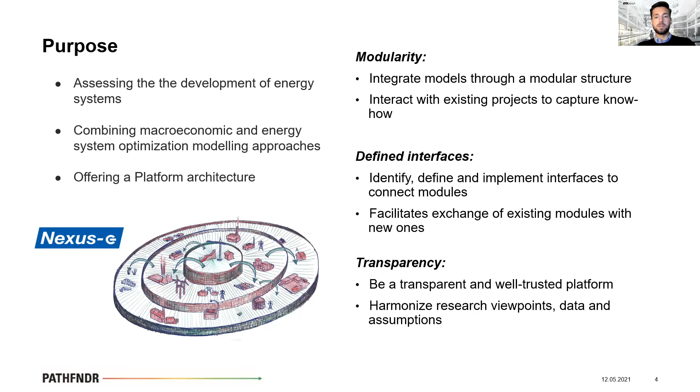Currently, the platform offers 5 core features that build upon knowledge and methods from different disciplines, such as electrical engineering and macroeconomics, and currently focus mostly on the electricity system. And these 5 core features comprise the electricity system optimization of the centralized and decentralized system, electricity market optimization, grid security assessment, and macroeconomic assessment. I will come back to these core features at a later part of the presentation.

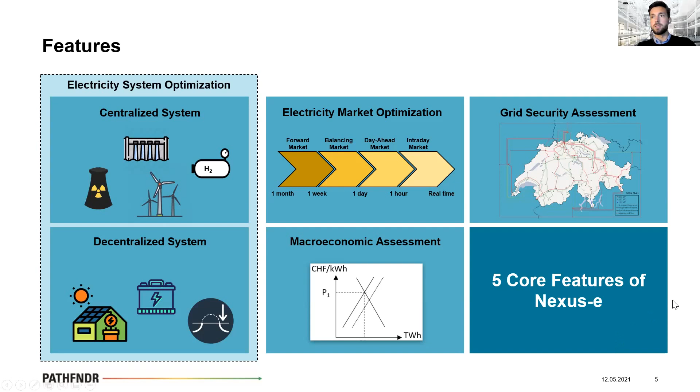Using these core features, Nexus-e is able to represent electricity systems in full detail on transmission grid level, including lines, nodes, and generation capacities. Countries are hereby either represented in such full detail or in aggregated form, for example, as a single node that combines national electricity production and demand, or even only as an exogenously fixed electricity flow.

In principle, the temporal coverage is unlimited and only depends on input parameters, but currently we typically model the years 2020, 2030, 2040, and 2050. Simulating such multiple years also allows to include path dependency, meaning that the model knows in its 2050 simulation what has happened today, in 2030, but also in 2040.

Furthermore, Nexus-e can take different temporal and spatial resolutions depending on the model or module. For example, while the macroeconomy module has an annual and national resolution, the module for investments and operation of centralized energy units has an hourly and nodal resolution.

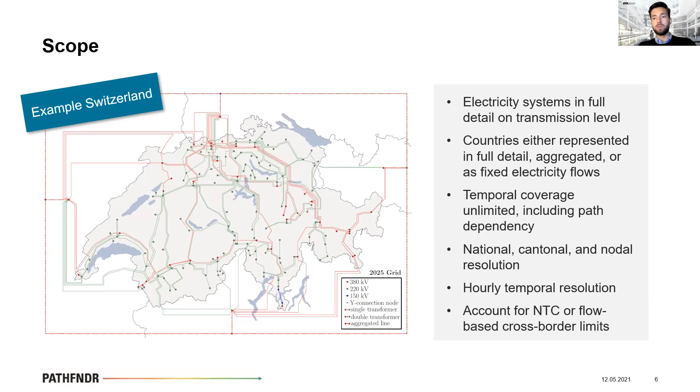So how can Nexus-e be used? Last year, we completed the pilot and demonstration project, the role of flexibility providers in shaping the future energy system, together with BFE and two industry partners. The goal of the project was to develop a suitable tool with which we can represent the Swiss electricity system holistically. In particular, we wanted to compare centralized and decentralized technologies as options to provide short-term and long-term flexibility.

Short-term flexibility balances sub-hourly and hourly deviations in the actual electricity demand and generation, and it supports system stability and frequency control. While on the other hand, long-term flexibility accounts for the daily, weekly, and seasonal needs for generation or oversupply because of outages, weather conditions, or seasonal changes.

In particular, we aim to answer 4 research questions. What are potential pathways for the future Swiss electricity system? What is the need for flexibility in such a system and who provides it? And lastly, what are the macroeconomic and environmental impacts of such a system?

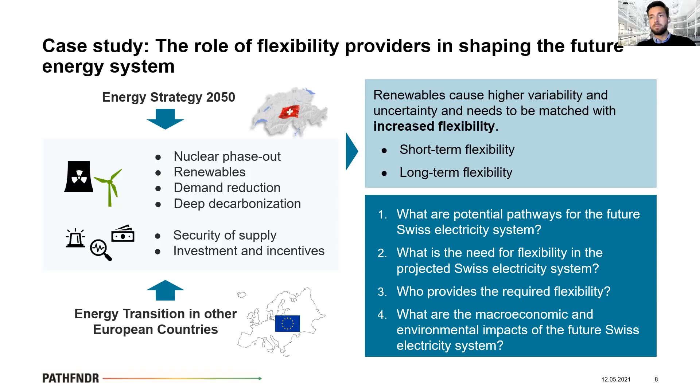To address the questions, we defined 3 scenarios. The baseline scenario represents the business as usual and includes expected technical and economic developments, as well as the status quo of the Swiss policies.

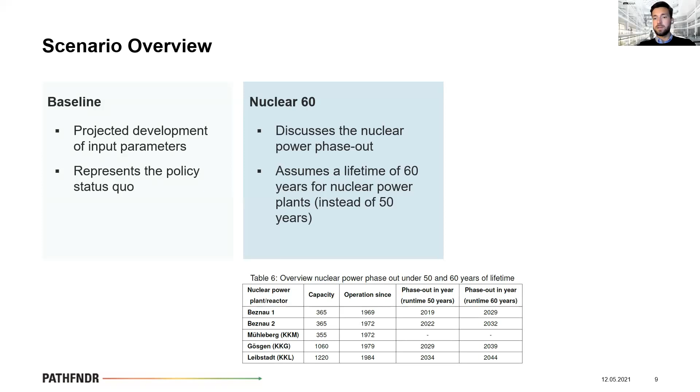The nuclear 60 scenario reflects the uncertainty around the phase-out of nuclear power in Switzerland and assumes that nuclear power plants will be decommissioned after a lifetime of 60 years instead of 50 years in the baseline scenario. The high flexibility scenario simulates the impact of an increased supply of distributed flexibility in the electricity system and assumes lower battery costs and higher potential for demand-side management.

In order to visualize our simulation results faster and to make them publicly available, we have developed an interactive visualization tool and made it available on our homepage. And I would like now to use this tool to also present some selected results. So I will now switch to the browser, and please let me know if you don't see the browser.

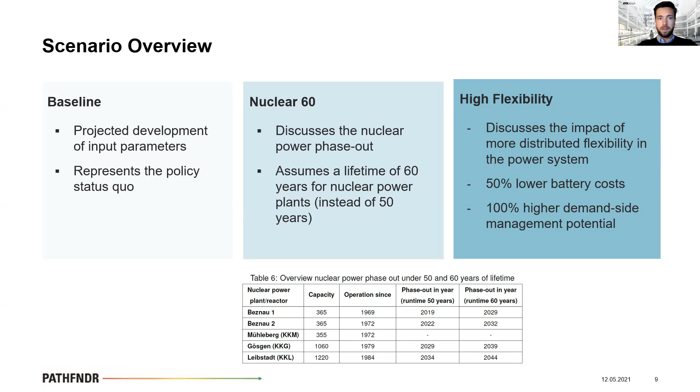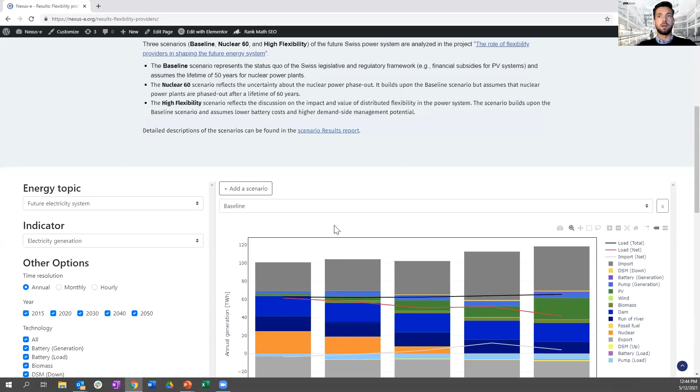So here you can see this is our Nexus homepage, and we have here the button for the results viewer, where you can have a detailed look at the scenarios which I just described: the baseline, nuclear 60, and the high flexibility scenario. So I will now have a closer look at the total capacity development for the baseline scenario.

So what do these changes in generation capacity mean for electricity generation? For this, we can look at the electricity generation tab, again for the baseline scenario, from 2015 to 2050 in terawatt hours. And what you can see is that in the baseline scenario, PV cannot compensate for the loss of nuclear power despite its substantial investments. Therefore, at least in our simulation results, Switzerland becomes a heavy net electricity importer in 2030, 2040.

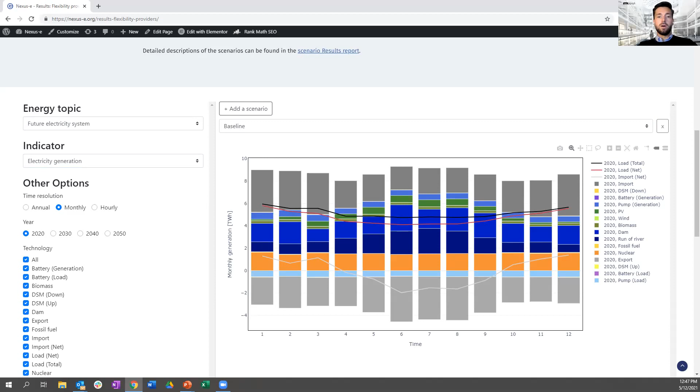Now we can have a look at the same graph for the year 2050. And what we see is that the known problem actually becomes even more drastic. In summer, we can expect a significant overproduction by solar power, while the domestic power deficit will continue to increase in the winter period.

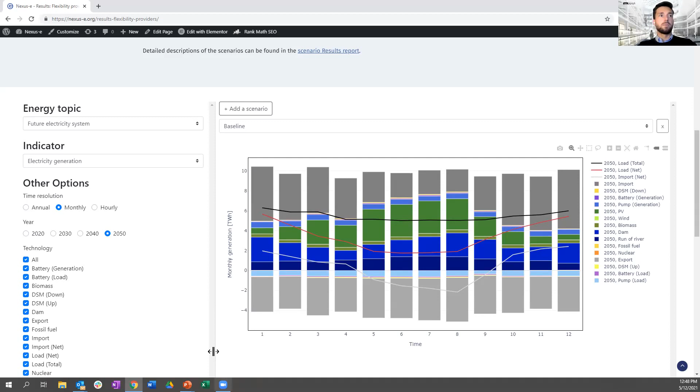Again, in our scenarios and simulation results, the required seasonal flexibility is achieved mainly by imports and exports, so importing in winter and exporting in summer. Then also solar curtailment and operational adjustments of dams to generate more electricity in winter. Besides the seasonal flexibility, we can also have a look at the hourly flexibility for 2020.

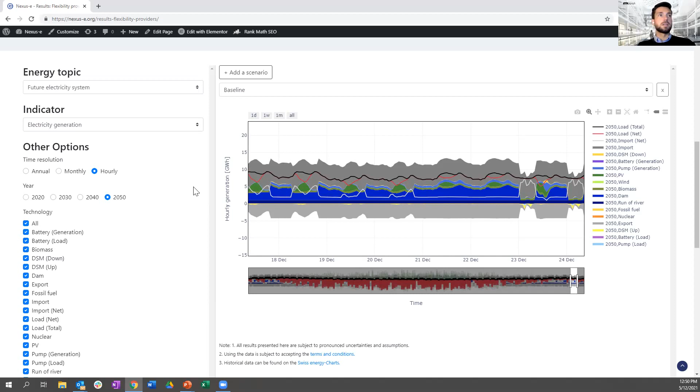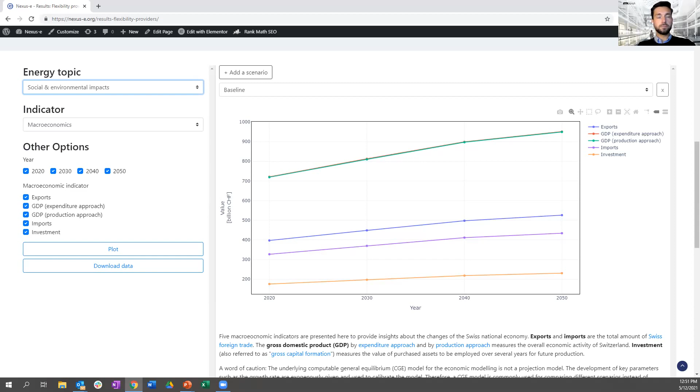There are many more results, such as on grid security, or on social and environmental impacts available on the interactive visualization tool, and we will also provide more scenarios in the near future. Coming now back again to the slides.

And how does Nexus-e work exactly to create these results? For the presented case study, we use all core features to assess the Swiss electricity system. And in the first step, the electricity system optimization determines investments in new generation and storage technologies based on least cost criteria. In turn, the electricity market optimization uses available existing power plants and new capacities for its dispatch, considering the full range of electricity markets such as the forward market and the intraday market.

In turn, the grid security assessment checks the impact of grid lines and transformer failures on the likelihood and severity of blackouts. It also provides suggestions for grid updates if grid security level is lower than today's ones. Finally, the macroeconomic assessment provides insight into how investments in the electricity system change the level of GDP, the output of economic sectors, and CO2 emissions.

For the presented case study, we include 14 generation and 3 storage technologies and represent the transmission grid in high detail. So 298 lines, 165 nodes, and 313 generation units in 2020. We also include Germany, France, Italy, and Austria, but in an aggregated form, so as one node only.

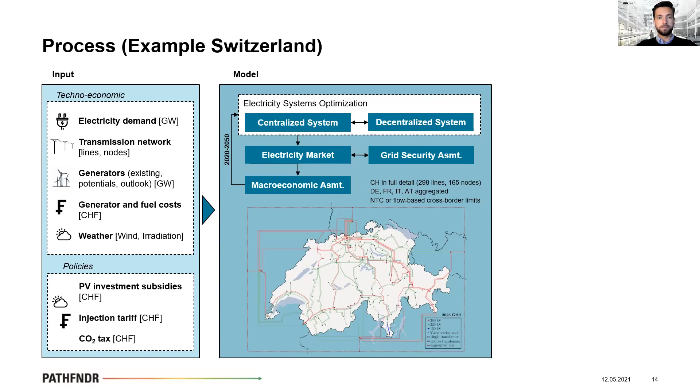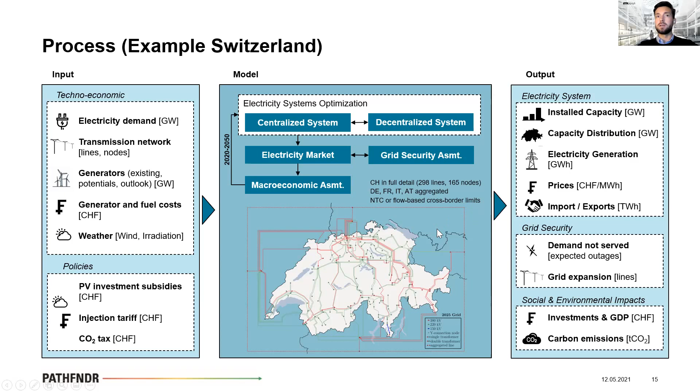So we produce outputs for the electricity system, grid security, and social and environmental impacts. I think I've shown them before in the interactive web viewer. So far, I've mainly focused on the outputs for the electricity system, such as the installed capacity, the electricity generation, and imports and exports, but we can also show the development of prices with an hourly resolution, and also the capacity distribution within Switzerland. So that's for the modeling process.

What I've mentioned in the very beginning is that we see Nexus-e as a modeling platform that is continuously used and extended. And also in PATHFNDR, Nexus-e will be developed further. And as you maybe have already realized, so far we're mainly focusing on the electricity sector. So the main objective in PATHFNDR is to transform Nexus-e from an electricity system to an energy system model. And to do so, we add more sectors of the energy system, including heating, the industrial sector, transportation, and the gas network to the platform.

I think we're especially happy to collaborate with new research partners on these tasks who bring in their knowledge and also existing models so that they can connect them to the existing platform architecture. So we don't have to develop models from scratch, but can include existing ones into the platform.

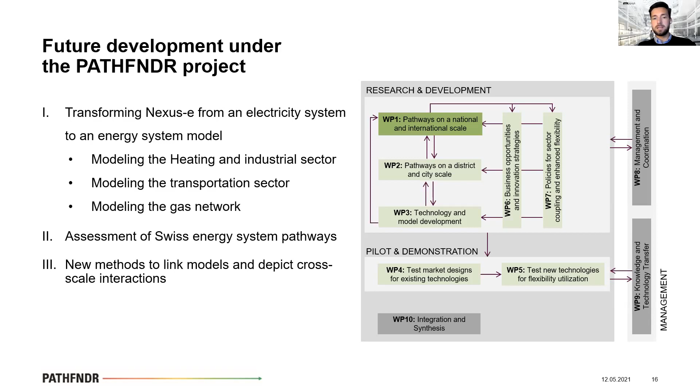Making Nexus-e then an energy system model allows us within the context of Pathfinder to assess the Swiss energy system pathways. And in addition, jointly with other groups, also within the Pathfinder context, we developed new methodologies for linking models and depict cross-scale interactions with them.

So already in an ongoing project, we are linking Nexus-e to EuroCalliope, which is also an energy system optimization model. And this collaboration is extended in Pathfinder. And this link, Calliope, provides the developments of the European energy system, while Nexus-e uses these developments as boundary conditions for a more detailed assessment of the Swiss energy system.

New in PATHFNDR will be the link to the Expanse model. And here Expanse will use Nexus-e output as boundary conditions for an assessment of municipality level energy systems. So I will not go into more detail what is EuroCalliope and Expanse, because I think they will also have a lunch talk session for themselves.

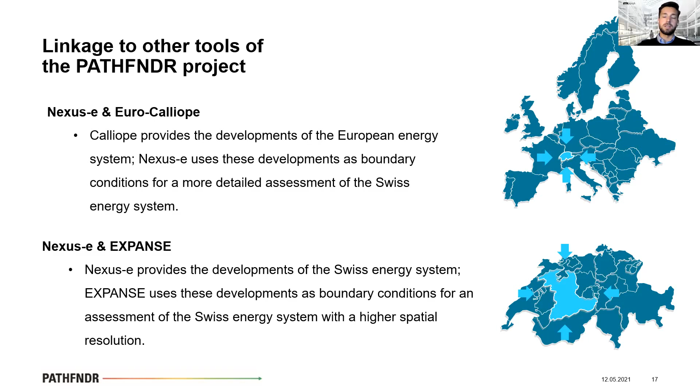There's also interaction planned with the other models used in Pathfinder, for example, Remap, but it has yet to be defined how this interaction will look like. Besides the main modeling processes and their developments, I want to highlight three more aspects of Nexus-e. And the first one is model validation.